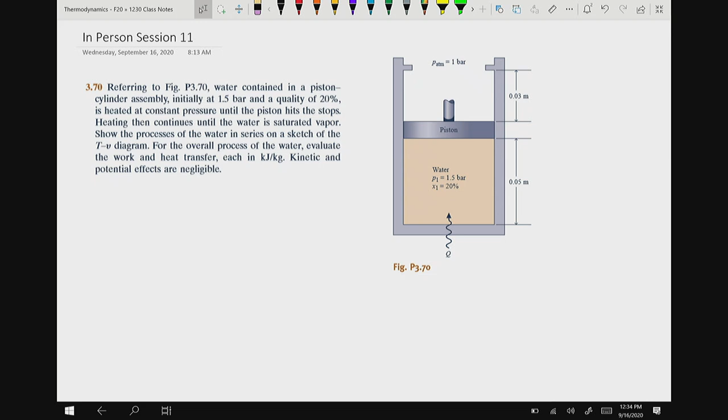We're going to refer to this picture. We have water contained in a piston cylinder assembly initially at 1.5 bar and a quality of 20%. So immediately when I see that information, I'm going to start saying state 1: it is a pressure of 1.5 bar, and the quality is equal to 0.2. It is heated at a constant pressure until the piston hits the stops. Heating then continues until the water is a saturated vapor. Show the process of the water in series on a sketch of the T-v diagram.

Okay, I've asked problems like this before on exams, and my goal in these sessions is to bring problems that people usually have a little trouble with, and this is one of those, because they don't realize that instead of having 2 states, this problem has 3 states that we need to deal with. So let's talk about that.

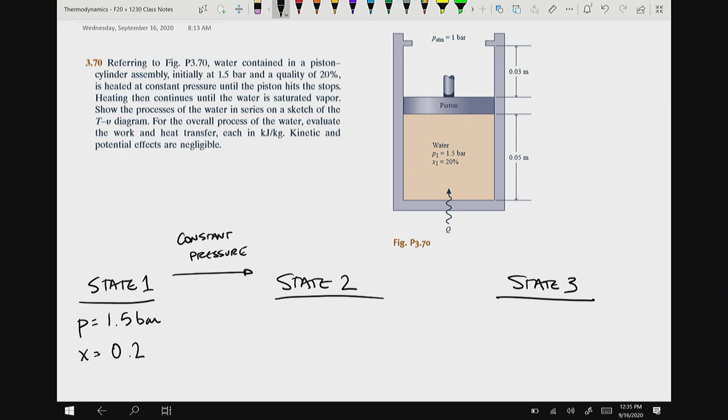We're going to have state 2, and then we're going to have state 3. We know there are 3 states because there are 2 different types of processes happening here. Remember, processes go between 2 states. So the first process between these 2 is going to be a constant pressure process until this piston hits those stops. And once it hits those stops, as we add more heat, we are going to have a constant volume process, but the pressure is going to change.

Okay, and we need to denote these things very clearly. Now, it says here that we're going to continue the heating until the water is a saturated vapor. So that means our final state is a saturated vapor.

They give us that information, and then they say find for the overall process, evaluate the work. So they want to know the sum of all the work, which is going to equal the work from 1 to 2 plus the work from 2 to 3. And they want to find out what is the heat transfer, which is the heat transfer from 1 to 2 plus the heat transfer from 2 to 3. That's what they want to find.

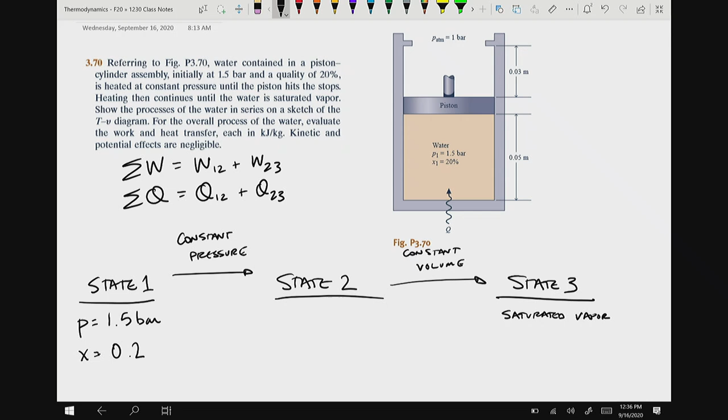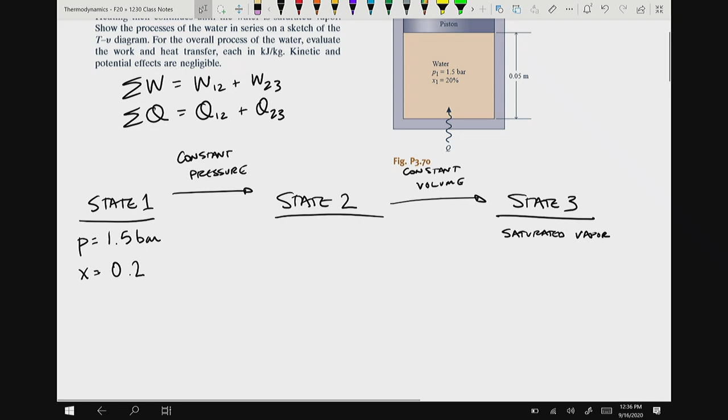We look at this and we think, well, the first thing we're going to have to really do here is set states, and there are 3 states there. I know that I had to have 2 pieces of information to solve, to find every state, and right now I don't know if I have it all. Now, we actually do, but it may not be clear to us in the problem. The problem statement just doesn't say state 1 is this, state 2 is this, state 3 is this. We're going to have to decipher what the information is with our secret decoder ring, what's going on here.

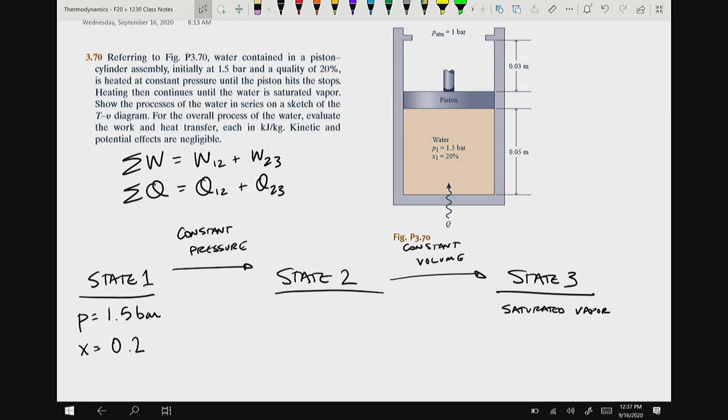So the first thing I want to do is draw a T-V diagram because that really will help me. It's asked for in the problem statement. I'm going to draw my vapor dome.

And I know one thing: I know state 1 is 1.5 bars and 0.2, so I'm going to draw a line here that is going to be my 1.5 bars. And I know that my quality is 0.2, or 20%. So here it is. This is going to be my state 1.

Okay, now I have to reason through this problem. State 1 is right there. I don't exactly know where state 2 is, but state 3, they told me it's a saturated vapor. And I know when that piston goes and reaches the top of those stops, and if I keep adding heat, I know that the pressure is going to rise inside of that piston cylinder.

I know that from personal experience, but I also know that from what we've been talking about in thermodynamics. Whenever we have a volume that's rigid and we add some heat to it, the pressure is going to keep rising and rising. So we know that we're not going to be at this 1.5 bar line. We're going to be at another line, so let me just draw some other line up here.

This is going to be my second pressure, and I don't really care what it is. I'm going to call this pressure 3. And our point is going to be right here at the saturated vapor. This is my point 3. Okay, I've reasoned through it. I don't know enough information about it yet, but I know it's probably someplace there. Where is my state 2?

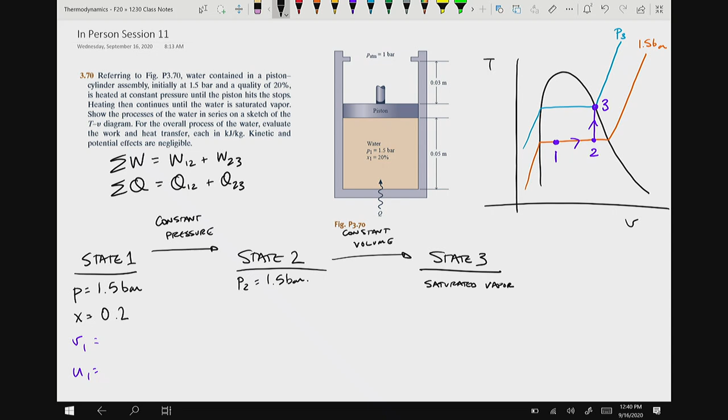I'm going to use the quality equation, where the value I'm looking for equals the value at the saturated liquid plus x times the value at G minus the value at F. I'm using a box because I can put V or U into this equation and find out where it is. For those of us at home, I'm going to go to my document camera.

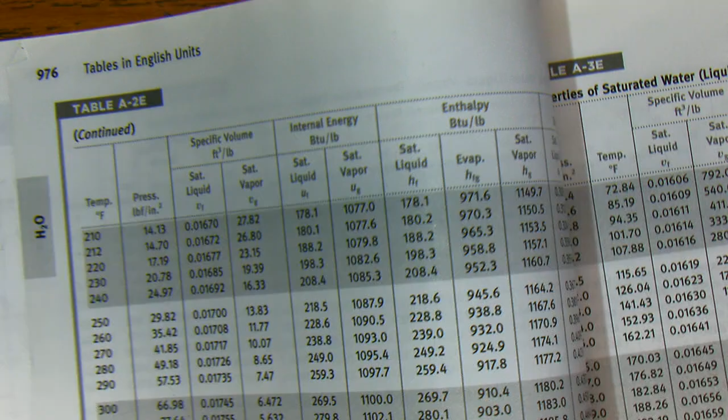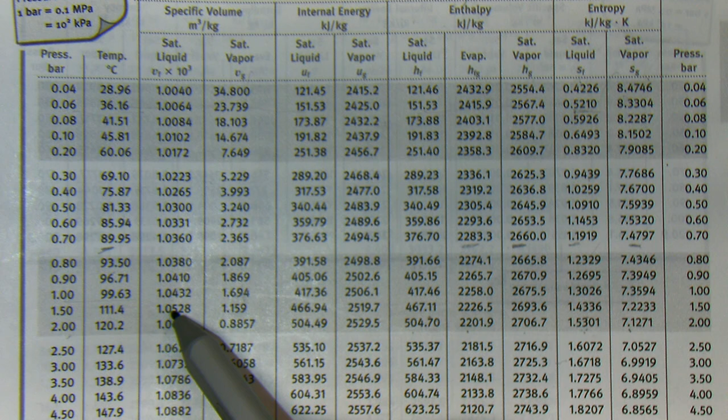I'm going to go to 1.5 bars. Here's my 1.5 bar entry for water, and I know it saturates at 111.4 degrees Celsius. My specific volume goes from 1.0528 times 10 to the negative third, remember that, to 1.159, and my internal energy goes from 466.94 to 2,519.7.

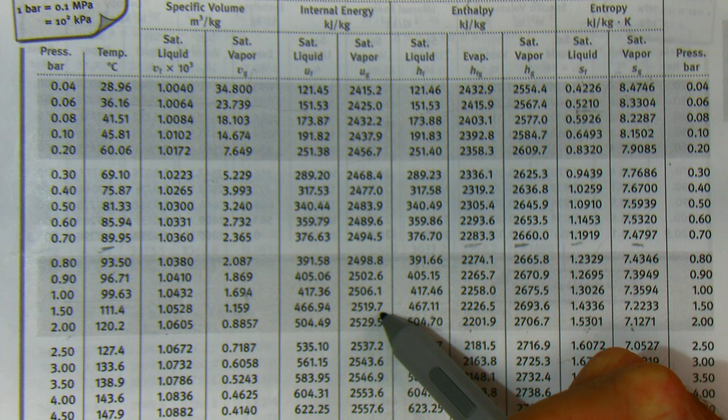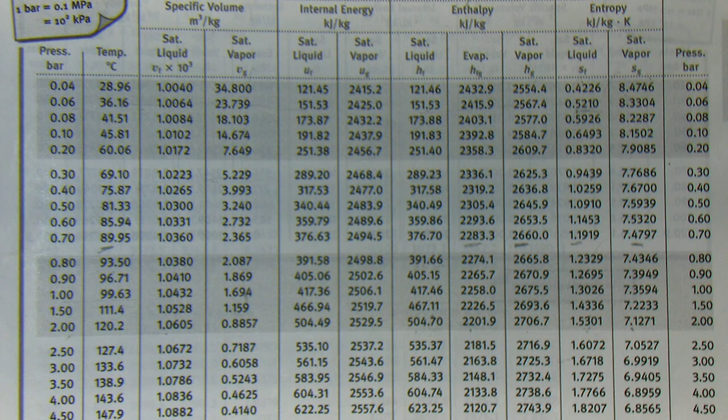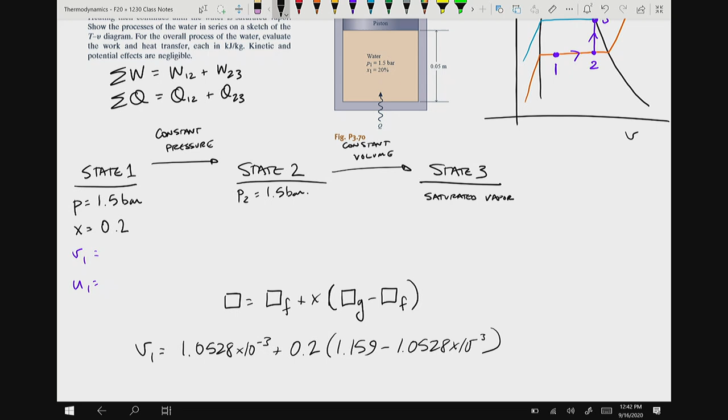We're going to say that our specific volume at 1 is equal to 1.0528 times 10 to the minus 3, plus a quality of 0.2 times 1.159 minus 1.0528 times 10 to the minus 3. I'm going to save us some calculation time and just tell you that the specific volume at 1 is equal to 0.2326 meters cubed per kilogram.

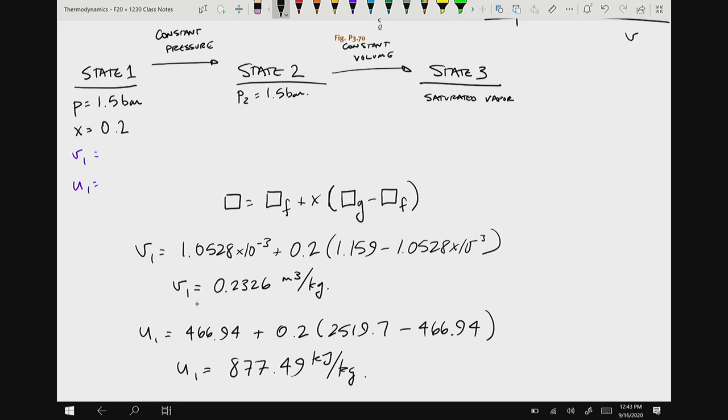And then I'm going to go find my internal energy. My internal energy at 1 is going to be equal to 466.94 plus a quality of 0.2 times 2519.7 minus 466.94. My internal energy at 1 is equal to 877.49 kilojoules per kilogram. Okay, these are some intermediate answers that I'm going to need.

And I've completely set state 1 for everything I'm looking for. That's great and all, but I still haven't determined how I can find anything about state 2 or state 3. So I think for a minute, and I say, okay, what do I know about this situation?

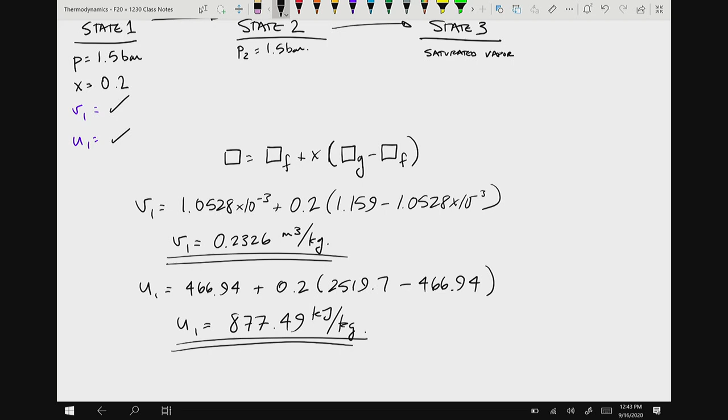Well, I know that this is a closed system. What connects state 1 and state 2 together? Well, they have the same pressure, but there's one other thing, and that is they have the same mass. Okay, so let's look at how we're going to calculate mass.

I know that mass at state 1 is equal to the volume at state 1 over the specific volume at state 1. Now, I know the mass at state 2 is equal to the volume at state 2 over the specific volume at state 2. Because my mass at state 1 has to equal the mass at state 2, that means the volume of 1 over the specific volume of 1 is equal to the volume of 2 over the specific volume of 2.

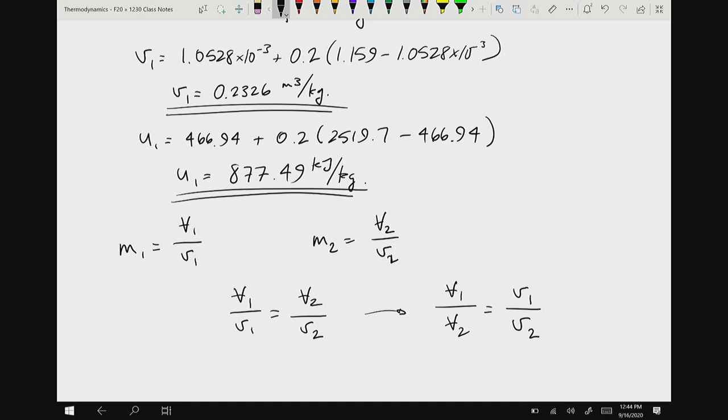I'm going to write this a little differently: volume 1 over volume 2 is equal to specific volume 1 over specific volume 2. This is true between state 1 and state 2. Okay, you're saying that's great, Dr. Wanklin, but we still only know specific volume 1. There's still an equation with 3 unknowns.

Okay, let's see, how would we calculate the volume? Well, they gave us some information in this problem, so you kind of have a clue when they gave us the height here. They gave us that this is 0.05 meters. And so if we wanted to find the volume at 1, we'd find the area of the piston times that height, and we would get a volume. Now, we don't know the area of the piston.

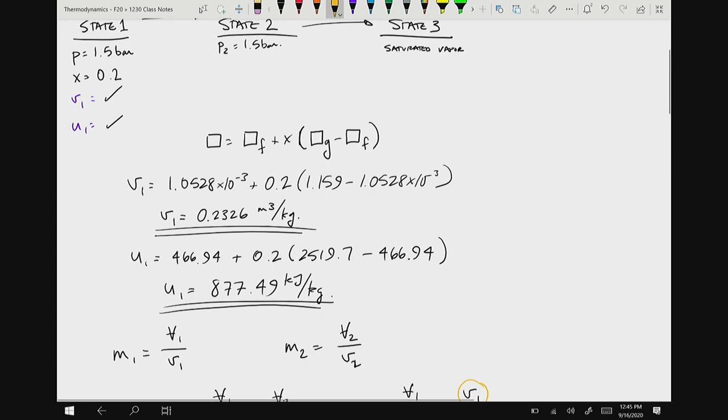We don't know it, but look what happens here when we do this. If I want to say what volume 1 is, it's going to be the area of the piston times the height, which is 0.05 meters. Now, volume 2 is going to be the same area of the piston, but instead of 0.05 meters, the piston goes all the way to the top, so we're going to have 0.05 plus 0.03, which is 0.08 meters. So 0.05 over 0.08 meters equals my specific volume at 1, which is 0.2326, all over my specific volume of 2. And what you see is that the area of the piston falls out.

So at times, if you don't know how to solve the problem or you have information that you don't know, put it in terms of variables and see if that variable doesn't cancel out somewhere along the way. It may not—it may be that you're not seeing something important in the problem statement, but sometimes something like this shows up.

And now, through this, the specific volume 2 that we find is going to be 0.37216 meters cubed per kilogram. And that's the key to the problem, really. Right here, this information is the key.

Because now that I've set volume 2, I know enough information to set state 2, and I know enough information to set state 3, because I have two pieces of information for both of them. The specific volume at 2 is equal to the specific volume at 3. This is also equal to the specific volume at 3 because of that rigid tank.

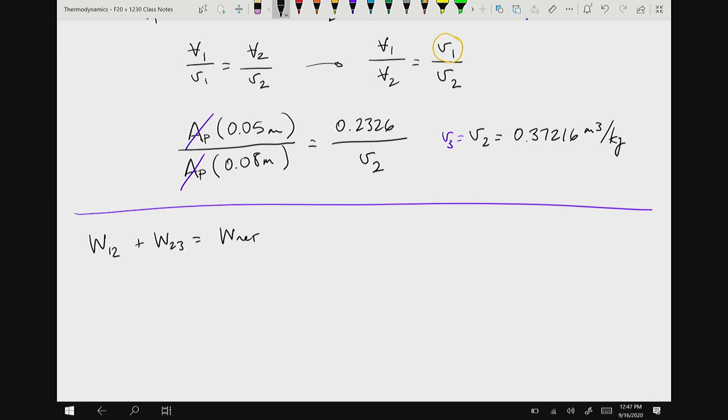So they want to know what is the work from 1 to 2, and I have to know what is the work from 2 to 3, and that's going to be equal to my net work, which is what I want. Now one other thing I should notice here is that this problem asks me for—

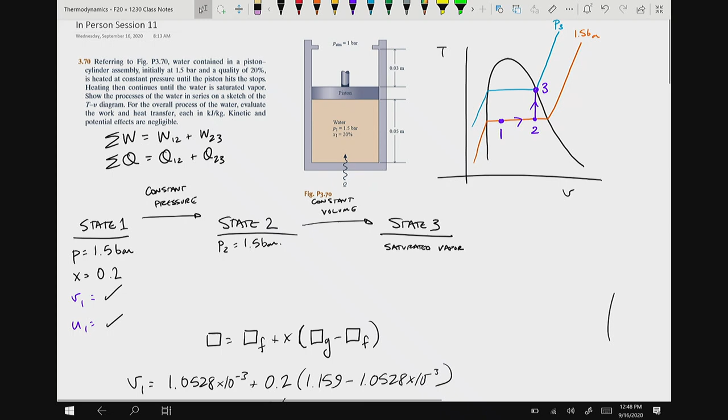Well, let's just do this separately. I know one of these works automatically: work 1,2 plus work 2,3. I know one of these works automatically without doing a calculation—which one is it? 2,3, and it is 0 because there's no boundary work happening there. So this one goes to 0, we're done with that.

I know that work 1,2, they told me, is constant pressure work, and I know work is equal to the integral of P dV. Constant pressure work means I can take pressure out of the equation, and I'm going to have V2 minus V1.

Now, I still can't calculate volumes—I don't have that area. I can't do it that way, but I do have specific volumes. So I say pressure times mass times specific volume at 2 minus specific volume at 1. Here, I know the pressure, I know the specific volumes, but I don't know the mass.

So I might freak myself out a little bit if I don't know the mass. But I want to go back, just like I did in class on Monday—when I'm in a situation where I can't figure something out, go back and read the problem statement. And the problem statement says: for the overall process of water, evaluate the work and heat transfer each in kilojoules per kilogram.

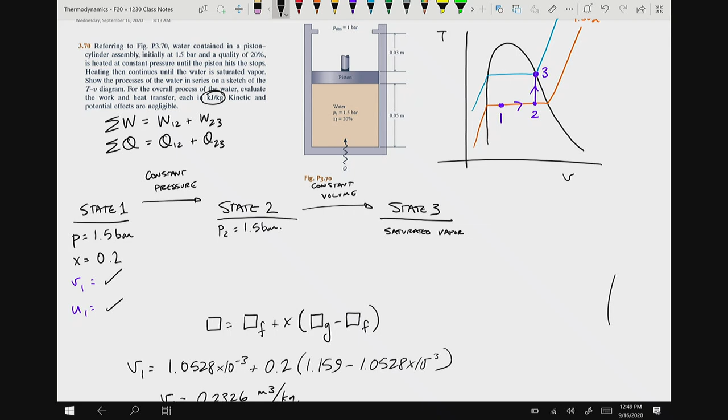It's asking me for specific work, kilojoules per kilogram. We're going to divide the mass out of it. So we do have everything we need. If I divide the mass out of it, I get work 1,2 divided by my mass—this is going to be units of kilojoules per kilogram. It is going to equal pressure times specific volume 2 minus specific volume 1. I'm good to go.

Okay, pressure—the pressure was 1.5 bars, right? 1.5 bars. My specific volume 2 is 0.37216 minus 0.2326. This is going to be meters cubed per kilogram.

I have some units that I have to work on here. I know that 1 bar is equal to 100 kilopascals, and I know that 1 kilopascal is equal to 1 kilonewton per meter squared. So bars cancel, a few of my meters cancel, and kilopascals go here, and I get kilonewton meters. This here is going to be a kilojoule, and I get kilojoules per kilogram, which is my correct units.

So now I can go ahead and do my calculation. I do my calculation, and I find that my answer is 20.93 kilojoules per kilogram. I think to myself, does that make sense?

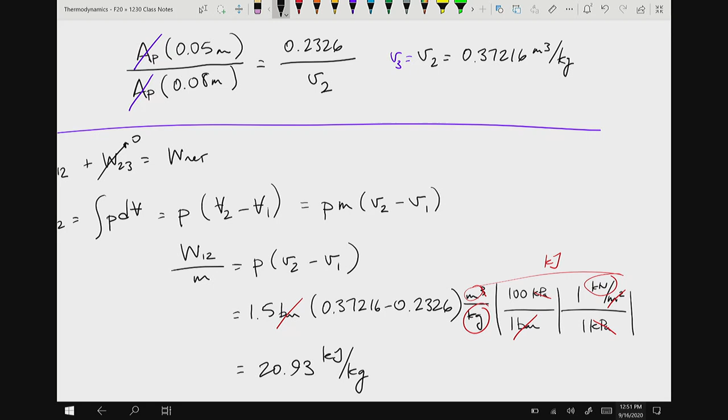And so this is going to be my work 1,2, and it happens to be my net work. My net work, because I'm adding 0 to that, is equal to 20.93 kilojoules per kilogram. Okay, there's my answer.

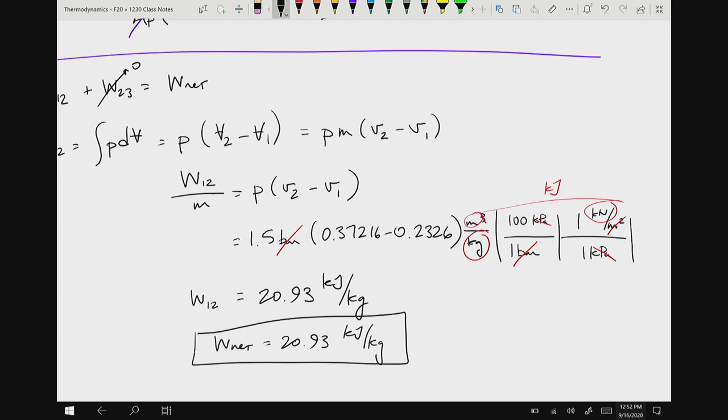We've done that many times. The addition to this thing is here is we have all these properties that we have to find in addition to doing the first law part. Just like on the exam you had 25 points of finding properties. On the next exam, all the finding properties is in all 4 of the problems. So you're going to have to know how to do both the problems and finding the properties all together.

The next thing we want to find is what the net heat transfer is. So I'm going to write down my first law equations for both things. The change in internal energy from 1 to 2 is equal to the heat transfer from 1 to 2 minus the work from 1 to 2. And the internal energy change from 2 to 3 is equal to Q23 minus W23. These are my 2 equations for my 2 processes.

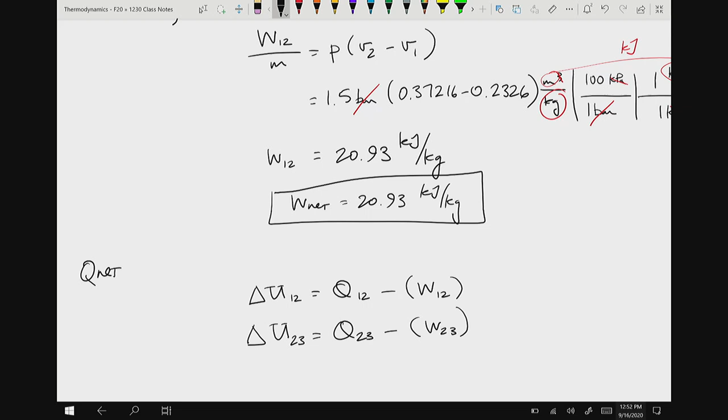They told me kinetic and potential energy effects are negligible. I'm going to show you a common mistake that I get on exams like this. They'll put a plus sign, they'll say this is going to be equal to the summation of my heat transfer, this is going to be my net, this is going to be the summation of my work, and this is going to equal 0. And so they know that Q net is going to be equal to the net work, which is 20.93. They'll write 20.93, put a box around it, and turn it in.

What is wrong about that analysis? It isn't a cycle. It isn't a cycle. You can only do this when it's a cycle. So no, it is not a cycle, we can't do this. Now it still has Q net and W net, but what we're going to have over here is the change in internal energy from 1 to 2 plus the change in internal energy from 2 to 3.

Now let's look at what these changes in internal energy are. These are going to equal mass times U2 minus U1, and this is going to be mass times U3 minus U2. So at this point in this question, you have a breaking off point that you can use to solve this problem. We know that we're going to divide everything through by mass, so this is going to be by mass, and by mass, and by mass, and by mass.

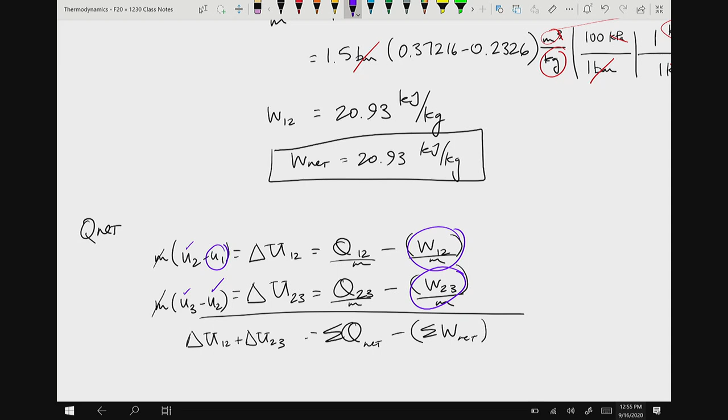Look down here what this is going to be. This would be equal to mass times U2 minus U1 plus mass times U3 minus U2. Look, you're going to have mass times U2 minus mass times U2, so this U2 drops out. And this is equal to mass times U3 minus U1, which is going to equal the net heat transfer minus the net work. And now in this equation, we know the net work, I guess I should say per unit mass.

And we know U1, all we need to do is find U3 and we're set. And that should make some sense to us. As all the heat is adding, the property of internal energy is changing from 1 to 3. We don't care what path it takes, how it goes, we just care that the heat that is added directly changes the internal energy. So we don't need to break it into pieces, we can just look at it holistically. Now the work, we have to break it into pieces because it's a different type of work in the first process and the second process.

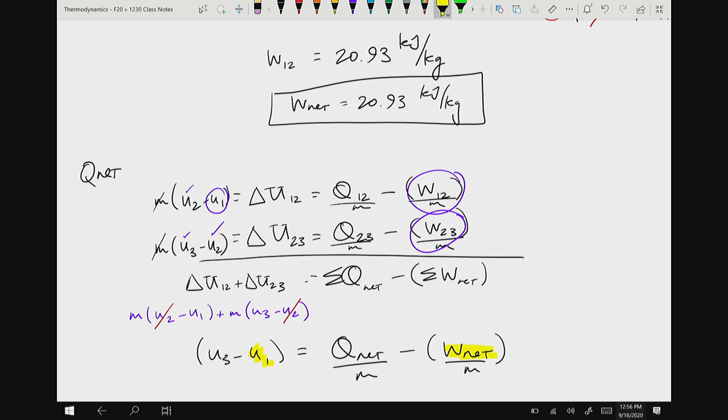Okay, so let's go and find what state 3 is. State 3, we say it's a saturated vapor, so what do we know about state 3? State 3 is a saturated vapor, and we know that the specific volume is equal to 0.37216 meters cubed per kilogram. So we go to our tables.

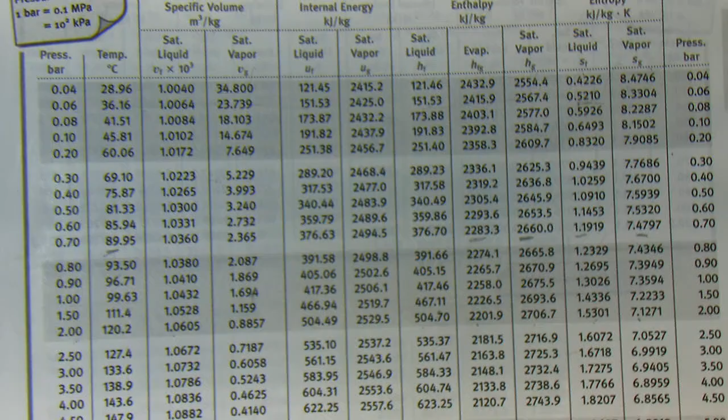We're going to look at our saturated vapor column, and we're going to try to find 0.37216. If I go down here, I have 0.3749 or 0.3757. So darn close to this table entry, but not there.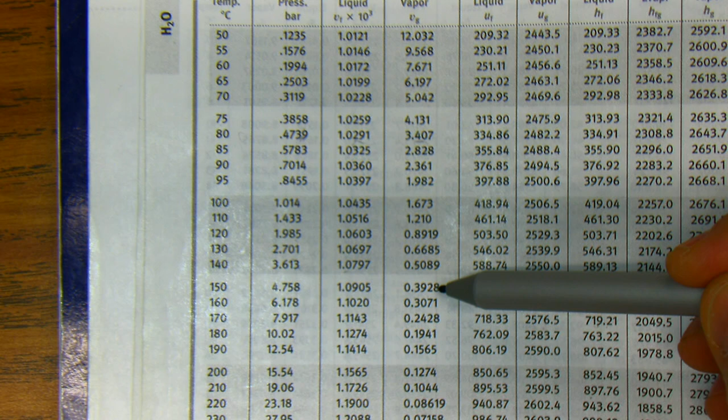Okay, so we're going to have to interpolate. Now, one other thing I can think of is maybe I don't have to interpolate if I'm looking in the nice even pressure table. Let's look at the nice even temperature table and see if that gives me the same thing. I'm going to look and see if I can find 0.37216. Actually, we're farther away here. The pressure table was better, but we could interpolate between these two numbers and get the same answer. This is just a different way of looking at things.

Now I'm going to stick with this. I'm going to stick with interpolating here, 0.37216. But let's just say that you're now on this problem and it's the test, and the test is done in 5 minutes and you don't have the time to interpolate and you need to do something, okay? If I were you in this case, I would write a note and say, Dr. Wanklyn, time's running out. I know that 0.37216

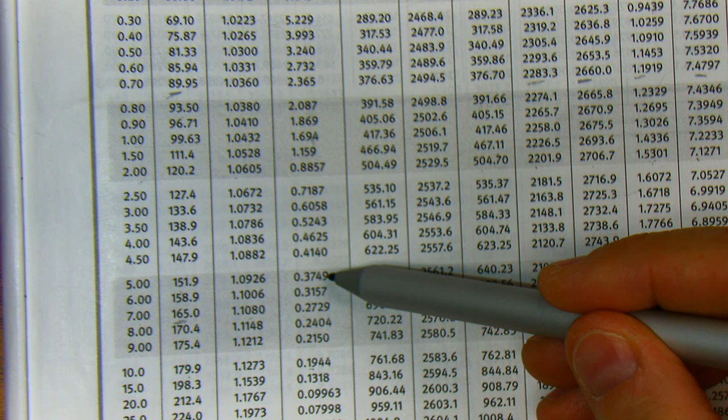is pretty darn close to 0.3749. And so instead of interpolating, I'm going to go ahead and say that's close enough, and I'm going to use this value for saturated vapor as my internal energy for state 3. Put that down, you answer the question. Will you get it? Would you get it right? No. But I'd take 1 point off and give you 24 out of 25.

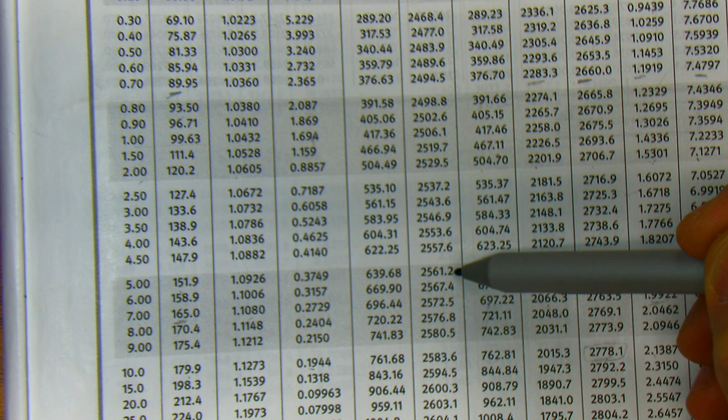If you stop the problem here right now and try to work on interpolating and everything like that and may not get a final answer, you might lose 4 points. I want you to see what you're thinking about, see where you're at here. Now that should only be done if you're in dire straits at the end of the exam and time's running out. If not, we're going to interpolate.

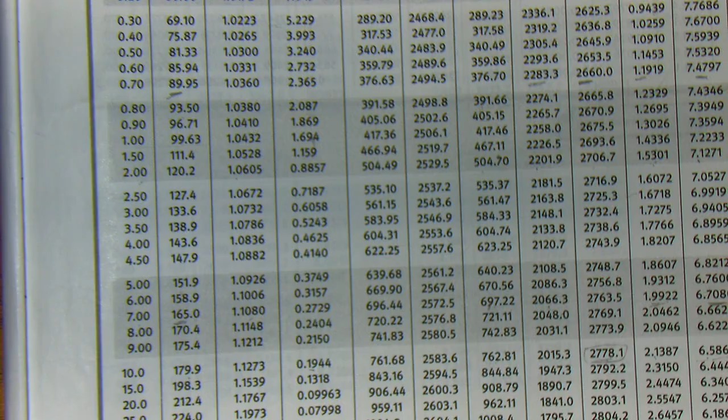So let's do the interpolation. This is going to be one of the ways to do it. 0.3749 minus 0.3157, I need to get over here to my laptop for those of you at home. 0.3749 minus 0.3157

is going to correspond to 2561.2 minus 2567.4. And that's going to be equal to 0.3749 minus 0.37216 all over 2561.2 minus the internal energy at 3 that we're looking for.

And if we do that, internal energy ends up being 2561.49 kilojoules per kilogram. It just changed that value. So if we would assume this earlier value, look, we're pretty darn close to it. But this is the exact value. So that's why that assumption works out.

And even if you were further away, it would still show me you knew what you were talking about. I'm concerned about what you know. Okay, I'm concerned about what you know.

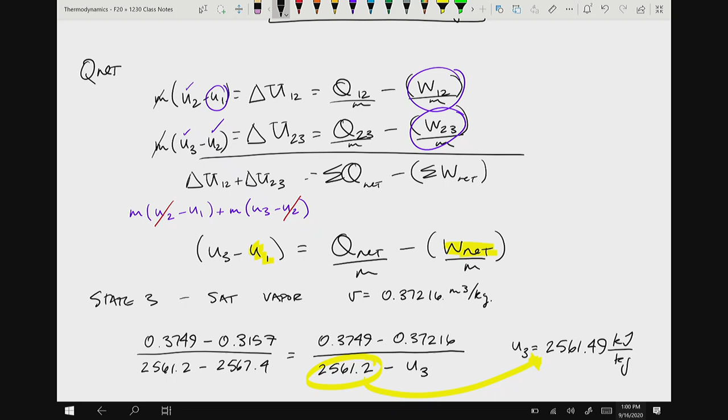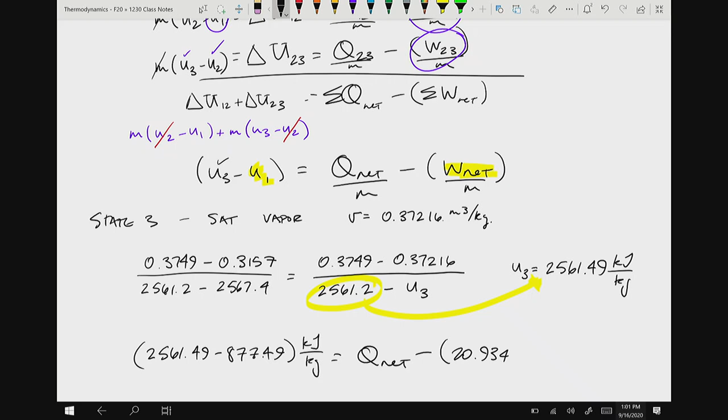All right, so now we know this information, and we can solve this problem. We can say 2561.49 minus 877.49 kilojoules per kilogram is going to equal our net heat transfer minus the value for our work divided by mass, which is going to be 20.934 kilojoules per kilogram. And we're going to end up, this is actually Q net per mass, that our Q net per mass

is going to give me 1,704.93 kilojoules per kilogram. Again, that's a positive value. That makes sense because the problem statement says heat is added to the piston. That matches what I think it should.

Are there any questions about this problem? Lots of things going on here. Lots of thinking that has to be done.

Okay, we're going to look at another problem that's very similar to it, and I'm not going to have time to go through it in detail here. So what I'm going to do is kind of set it up, give you some values, and then it'll be a good study problem, a good one to put a big star on to study for the exam with as we get going here.

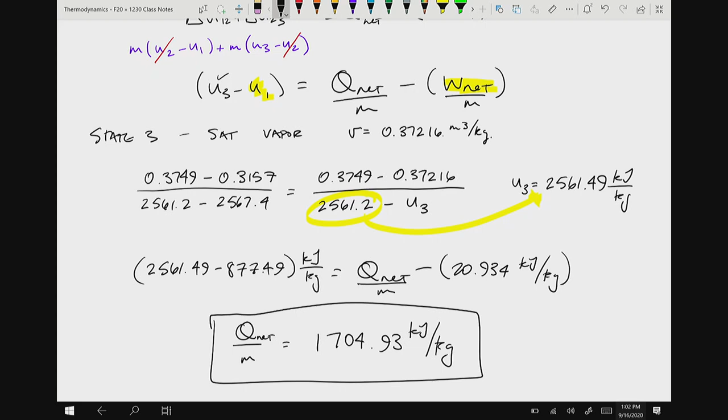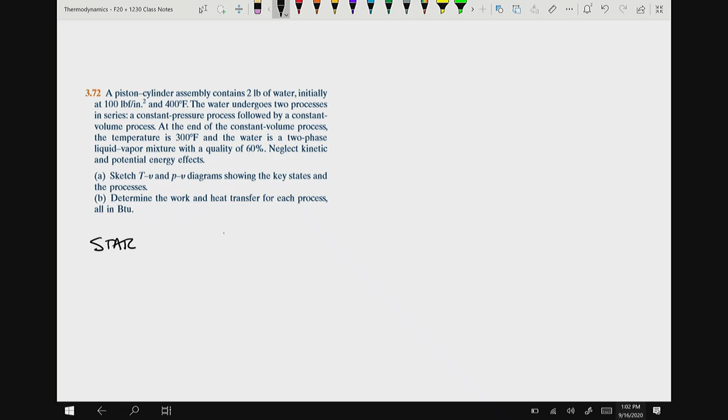Okay, so the next problem is this. A piston cylinder assembly contains 2 pounds of water. Now they gave me the mass of the water, and now we're in English units, and it tells us initially at state 1, pressure at 1 is equal to 100 psi, and the temperature at 1 is equal to 400 degrees Fahrenheit. The water undergoes 2 processes in series, a constant pressure process followed by a constant volume process.

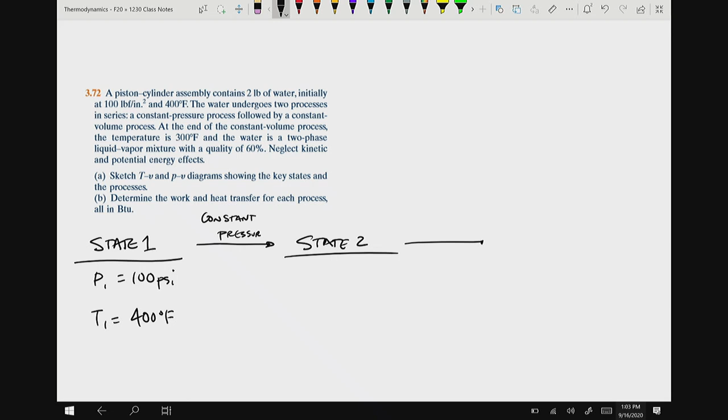Okay, so once again, we're going to have a constant pressure process, and then we're going to go to state 2, and then we're going to have a constant volume process to state 3. At the end of the constant volume process, the temperature is 300 degrees Fahrenheit, and the quality is 60%.

With a quality of 0.6, neglecting potential energy effects, sketch a TV and PV diagram showing key states and processes, and give me the work and heat transfer for each process in BTUs.

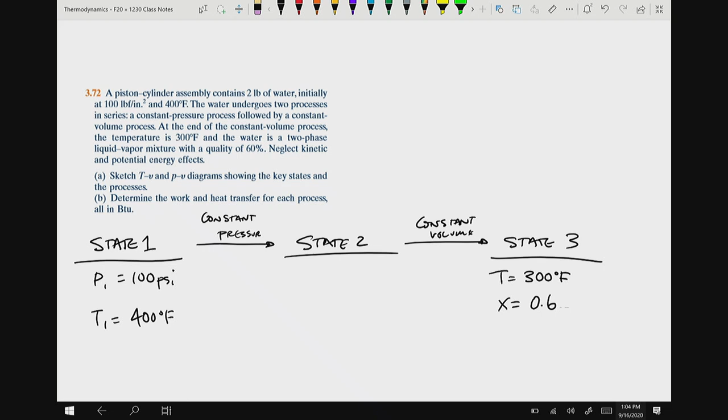In many cases, this is the same situation we had before: two processes, constant pressure and constant volume. But there's been some changes here. We've given you mass, and now we're starting someplace different, going to a saturated liquid, saturated mixture, whereas last time we flipped that around. Last time they asked for a TV diagram; this time we're asking for a TV and PV diagram. So let's see if we can draw those diagrams right away.

First I'll draw my TV diagram, my vapor dome. I know there's going to be a line here at 100 psi, so go ahead and draw that 100 psi line. Now I need to know where this saturates. For those of you at home, I'm not going to put this on the screen, I'm just going to look it up in my tables. Going to the 100 psi table, A3, it shows me that we saturate at a temperature of 327.86 degrees Fahrenheit, on table A3, first page.

My temperature is well above that, at 400 degrees Fahrenheit, so I know that I intersect here. This is my state 1.

Again, I don't know state 2, but I know state 3. State 3 is at 300 degrees Fahrenheit, which is well below this. So here's 300 degrees Fahrenheit, and I'm going to draw a line here. I know I'm at a quality of 0.6, so I'm going to say probably right there is going to be state 3.

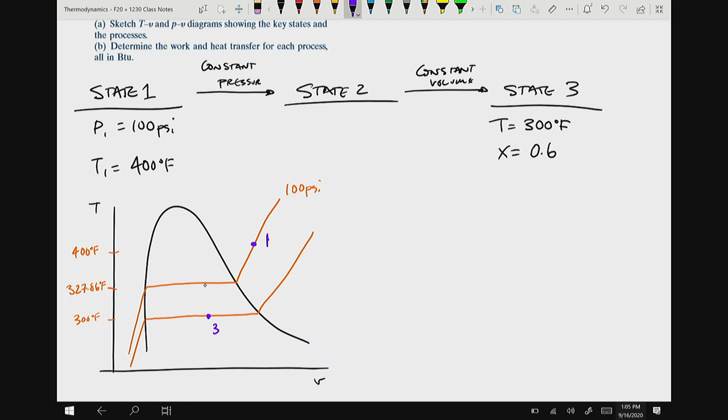And the same process follows, because between state 2 and state 3 we're in a constant volume, closed system process, so they're going to be constant specific volume. That means point 2 is right here above it; this is point 2. So here we go — this is my process from 1 to 2, and this is my process from 2 to 3, and we've drawn that line.

A very good point was brought up in the 8:30 class. State 2 and state 3 are on the same specific volume line, but this does not mean that the quality of state 2 and state 3 are the same. The quality shows how far you're going across that line, and the line that state 3 is on is longer than the line at state 2. So even though the specific volume is the same, they'll have different qualities. We'll be 60% along the line at state 3, and somewhere north of that at state 2.

Okay, let's now draw our PV diagram. We draw our vapor dome, and now 400 degrees Fahrenheit is the line we draw. We go up here and draw a 400 degrees Fahrenheit line, and look in our tables to find where we saturate at 400 degrees Fahrenheit — we find that we saturate at 247.1 psi. We're well below that, at 100 psi.

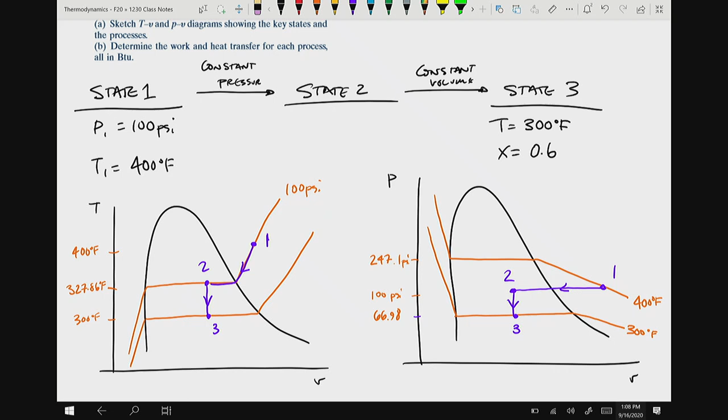Okay, and now we're going to go through here and start setting states. State 1 is superheated vapor. States 2 and 3 are both mixtures. All right, so I'm going to give you those values. So, state 1.

The specific volume of state 1 is equal to 4.934 cubic feet per pound. And the internal energy of state 1 is equal to 1136.2 BTU per pound. Nice, even lookups, no interpolation, 100 psi, 400 degrees Fahrenheit directly on the chart.

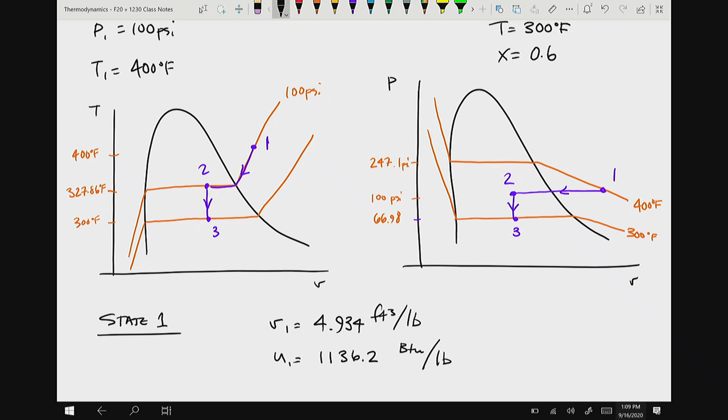Can't do anything for state 2 right now. I do know that state 2, the pressure at state 2 is going to be equal to 100 psi.

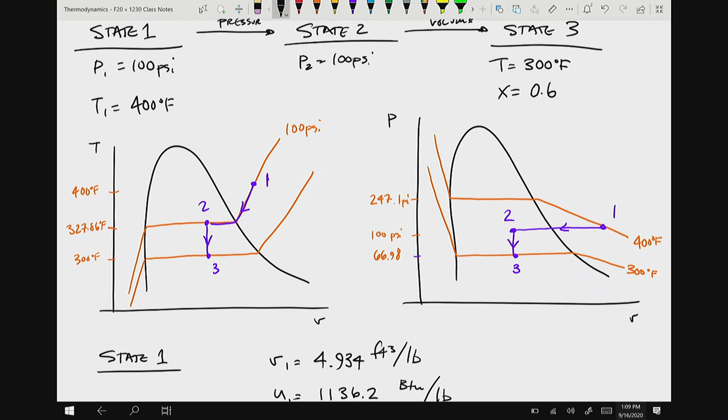So the connection between state 2 and state 3 is my specific volume at state 3, so I will set my state 3 first, state 3. And I'm going to use the quality equation.

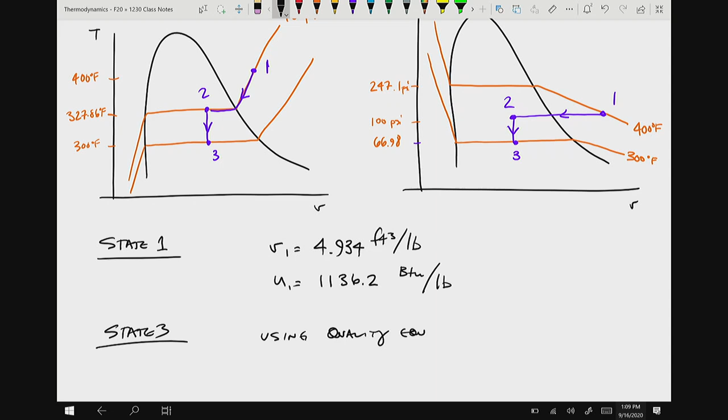I am going to find that my specific volume of 3 is equal to 3.89 cubic feet per pound, and that the internal energy at 3 is going to equal 767.8 BTU per pound.

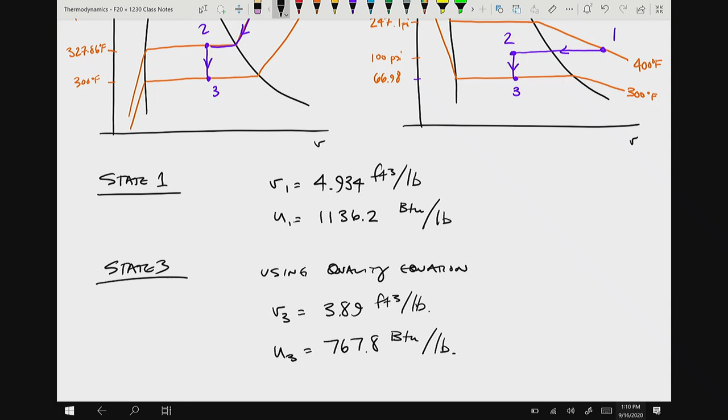Okay, now that leaves me with state 2. State 2, I'm going to say that V2 is equal to V3, and I have to be at 100 psi. And I'm going to know that at 100 psi, my Vg, now let's do it this way, Vf, my value of V2 is somewhere between my saturated liquid and saturated vapor.

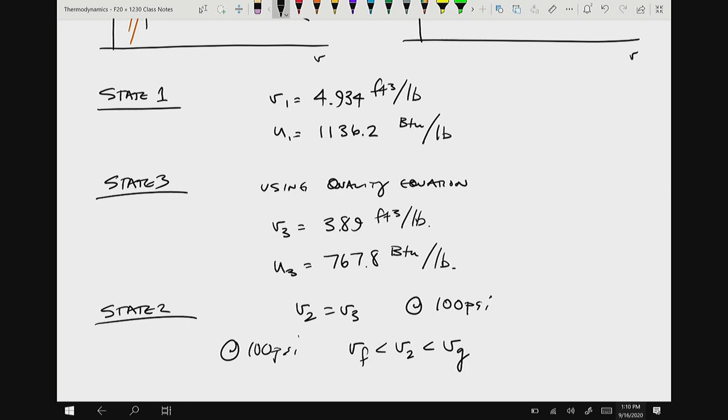And so I'm going to set an equation that says V2 is equal to Vf plus X times Vg minus Vf. And because I know everything in this equation except for X, I will solve for X and find out what the quality is for X.

Quality is for state 2. And that's going to give me that it's 0.877, or 87.7. So it's not the same quality as state 3. It's actually much higher than that at state 3.

And then now that I know the quality, I will use that quality to find out what U2 is. And U2 is 1006.48 BTU per pound.

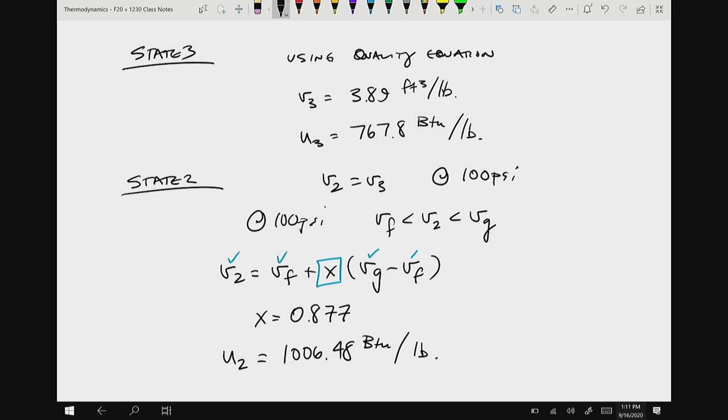And now that I have all these states figured out, I can go and use the first law and the work equation to find out what my work and my heat are. Again, I'm going to give these to you as the answers. I would like for you to work through and verify these answers. This would be a good effort for you.

So I'm going to just tell you that work 1 to 2 is equal to negative 38.64 BTUs. Makes sense that it's negative because the surroundings are working on the system.

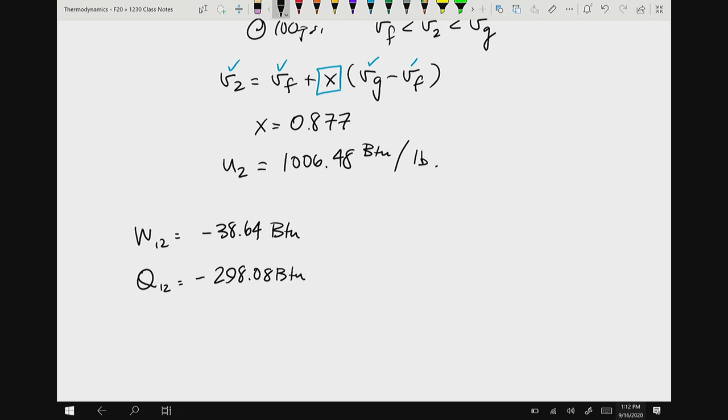The heat transfer from 1 to 2 is equal to negative 298.08 BTUs. The work from 2 to 3, it's constant volume, that's going to be equal to 0. And the heat transfer from 2 to 3 is going to equal negative 477.36 BTUs.

So because of time we didn't go through and do all those calculations, I would put a star on this, and when it comes to the next exam, make sure that you can go through this and find those, because depending on time, these are a little bit more involved problems. Depending on time, this would be a good problem to put on the exam to make sure that you can follow a constant pressure, constant volume situation.

In fact, you had enough information really in the first exam that you could solve this problem. You did. There's nothing new here. This is an exam 2 problem. I could have given you exam 1, but you had not matured into the idea of thermo that you had this all figured out yet. This is going to become second nature to you as we get going through the study. But it's really nothing new here. It's just trying to think through that process.

What questions do you have today?